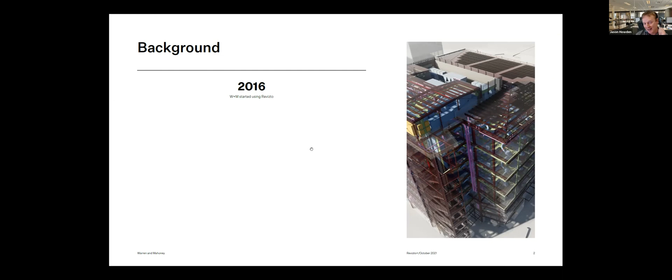Have you flicked slides, mate? Because we're still seeing the Revizto Plus slide. Oh, that's probably because it's crashed. I'll just reshare. Thanks, mate. Thanks for that. Is it flicking slides now? It's still sharing. Classic, it would be me that has the problems with Zoom. How's that looking now? Brilliant, and it's flicking. Michael shared screens on the other side. Anyway, I'll flick through the numbers because I've already talked about them.

2021 introduces a new era of collaboration. We feel pretty strong with Revizto Plus that it's hit the nail on the head, particularly for the way we want to work, and this presentation is covering some of the aspects of that.

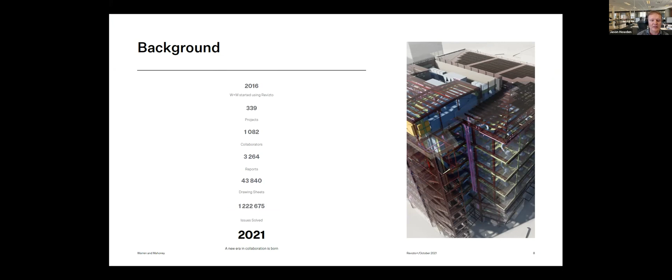Prior to Revizto Plus, our workflow—probably our past workflow now—was we'd have to export data, federate data, analyze that data, and then publish it to Revizto. Then we'd be able to report on it, share it with teams, and then get busy making the corrections. That was a reasonably efficient process for us. We'd worked hard to refine every step of the process, but it was still feeling like there was opportunity for refinement.

What we're calling collaboration evolved: now we just jump straight to exporting stuff to Revizto. We jump straight to sharing that information. Then we analyze, then we report, and then we can get busy revising the models.

I want to talk through a case study that we're doing live. This was a case study that we ran Revizto Plus on in the closed beta. We were very fortunate to have proactive, innovative clients, project managers, and a consultant team that we were working with. A little shout out to the University of Otago, the Building Intelligence Group, Baker Garden, Calibre, Cosgroves, Pedersen Read, and Beca for coming on this journey with us.

What we've loved about Revizto: search sets. Brett's already talked about search sets, and I think the strategy for almost mandating search sets is brilliant, because once you start to leverage the search sets and the data it can expose within the model environment, the world really does change.

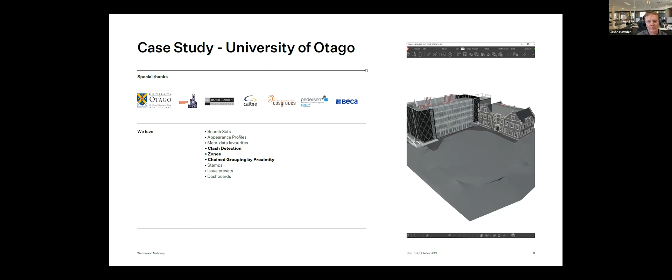I'm going to start at the start of our journey. The start of our journey starts with understanding our coordination matrix, or clash automation matrix. We really sat back and looked at all of our issues that we were tracking, all of the requests we were getting from clients and consultant teams, contractors and subtrades, and we started to map out at a very granular level what was important to each stakeholder, their priority, their tolerance. In doing this exercise, it became quite clear that if we could standardize the naming, grouping, or classification of each of these issues, we could create a system that could be automated.

We sat down to do this with Revizto Plus in mind, but at the time we made this, we were taking a leap of faith. We didn't have hands-on with Revizto Plus at this time, but we had insight that it was coming. We just responded to that leap of faith. We have around 260 individual clash tests in this matrix, and Revizto Plus has allowed us to essentially automate all of it, which is really exciting.

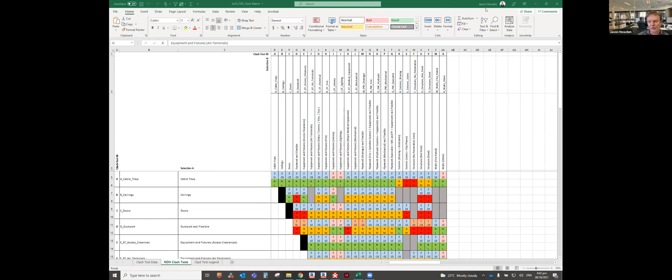The next place that I'm going to jump to is the Revit environment. And I think for us, what Revizto Plus has done is really enabled a bunch of workflows where we were having to invent workflows and workarounds on top of workflows to achieve an outcome. One of the outcomes that we were wanting to achieve with our work, because we work with a diverse range of client teams, consultant teams and contractor teams, is we were wanting to get some consistency, particularly with

the look and feel of the Revizto environment, with models coming in and every stakeholder having their own kind of appearance or view setting. We were wanting a way of controlling that. In our previous workflow, that was quite time consuming and quite cumbersome. It wasn't easy to transport. And with Revizto Plus, we were able to build our search sets to then link with our appearance profiles to really transport that to another level.

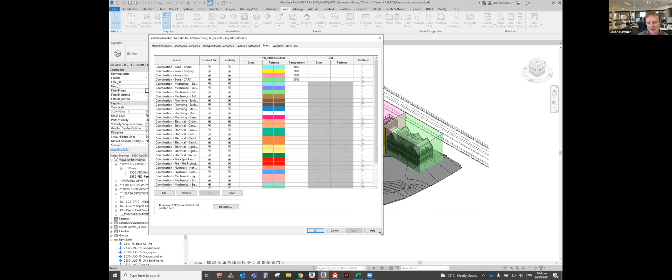So one of the things that we're doing in the Revit space is directly linking from BIM 360. So all of the models come through into a federated model space. I'm using some basic extrusions to create macro zones for the different buildings as three-dimensional spaces. And then inside there, we're using some view filters to create some coloring that we're bringing directly through into Revizto, which is an exciting move. It means this is templatable at a Revit level. I can swap out all the link files at will and transport this from project to project with relative ease.

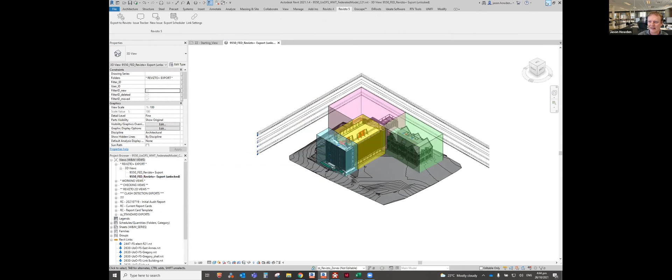And then to get it into Revizto, as I was commenting to a colleague, Michael, earlier today, I was running two projects side by side. One was in our previous workflow, one was in our new workflow. I was commenting that all I had to do was click this button in our new workflow, whereas the other project had several buttons to click and took infinitely longer.

So once it's in Revizto, at the face of it, it looks pretty much like how we were always doing it. The big changes that we've made with Revizto Plus were in preparation for the clash automation, which links back to that clash matrix that we saw before. We're heavily using the search sets feature inside Revizto. I don't think we necessarily followed Revizto in this space; we kind of got to the same destination at the same point. But creating some coordination search sets that mimic our matrix meant that we removed a lot of duplication and got a lot of power from it.

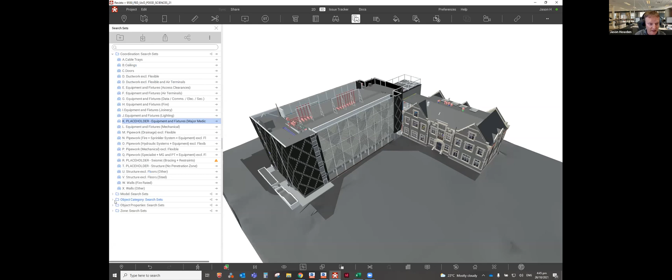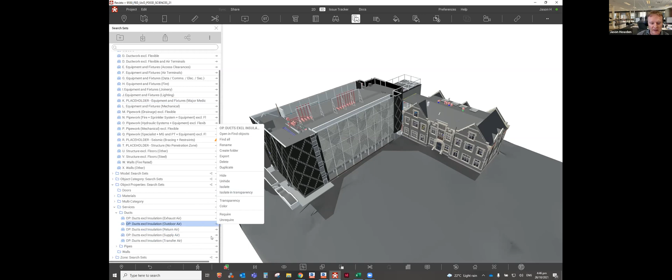Our classification system's just an alpha system, and each of these search sets nests inside another search set, which might be an object category search set, or an object property search set, depending on the type of object that we might be wanting to search for. Compound objects, as I like to call them, things like ducts and pipes, often have different items that we want to separate out. This allows us to do a whole bunch of really cool stuff. If we just want to see all the supply air ductwork, right click, isolate, bang, there it is. But it also means that we can test on that and report on that as an individual item.

I'm going to say big shout out, thank you to the Revizto team for bringing the home button back. Love it. It's my favorite button.

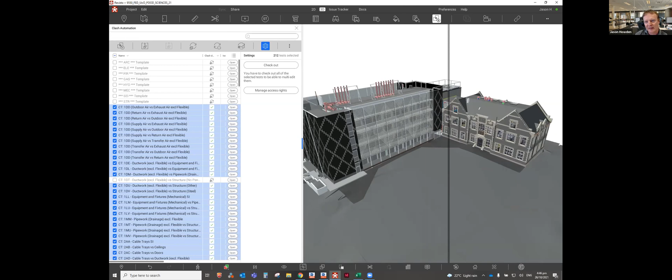In terms of the clash automation, I spoke briefly about the 200 plus clash tests. What I love about it is you can grab them all and then just run it, and it runs so fast. I kid you not. In the previous workflow, it used to take hours on some of our projects. Just the time saving alone, being able to come in, select one button, run it and have it complete in minutes, is a big saving.

But the stamps and the way we can filter these items is a big plus. So we use a classification system where we group the big stuff, the small stuff, and the trivial stuff, so we can report on it separately and also direct different teams to it. But we've doubled down on the stamping, and the stamps for us do a couple of things. I'm going to talk a wee bit about the stamps.

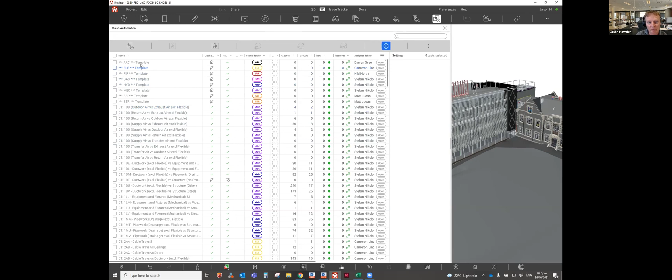So the stamps are part of our clash automation, and with our stamps I've set up templates for each type of stamp, which we can come to and edit, and I can quickly filter my list, so I can see all of the stamps in order or all of the names in order, but I can update a template and then apply it to all of the ones that have a similar stamp with a couple of clicks.

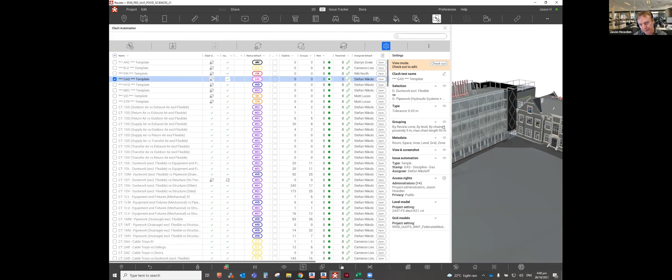In terms of the way we're templating it, we're templating both the grouping, some of the metadata, and really looking forward to when the clash or the issue automation comes online, so we can do more with that down the track. The grouping that we're doing in here, we're using a simple system of zone level chain proximity. And after tinkering around with the chain proximity, we found that 5 meters by 50 meters seems to be a really good fit. And I'll show you what that looks like.

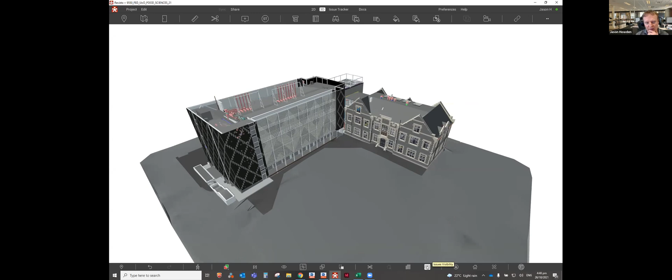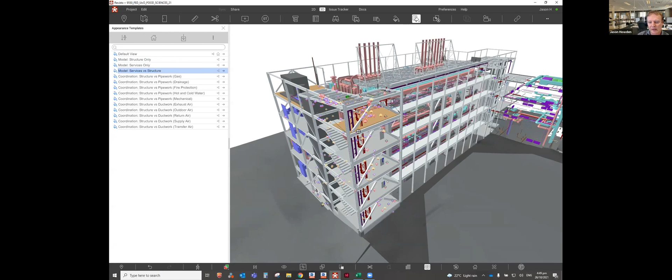The stamps, so I talked a wee bit about stamps and why it's so important to us, or one of the nifty features that we found with the stamps was the ability to see in context. So I've already talked about the zones of this project, but if I turn on all of the issue flags, the stamps actually give us really good intel into where all of the issues are, and who has those issues, in any particular part of the building. And then with the combination of the appearance profile, I can quickly just jump into and interrogate the building within a few clicks of the mouse, knowing that I'm always getting to where I need to.

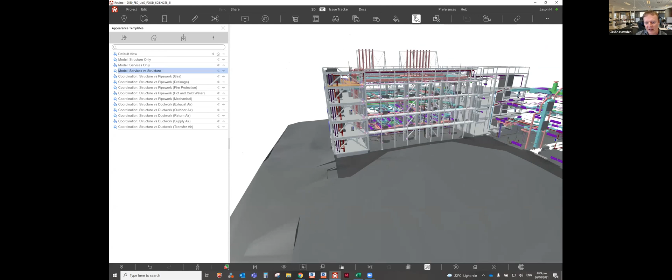Combine that with the issue presets in the issue tracker, I can then switch to another part of the building, filter those issues, jump back and see those changes update in real time. A simple little tag means so much. And the other bit that I like with this little tag is I love the fact that it has that little bit at the bottom that shows you the issue status itself, so you can track the status of these items as they roll through as well.

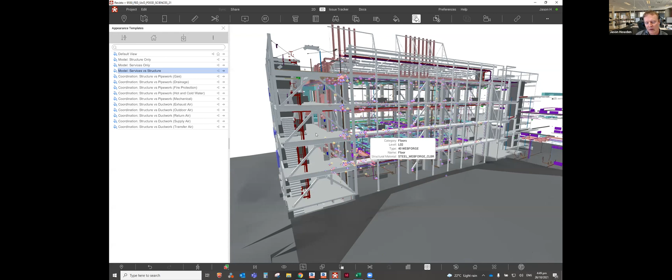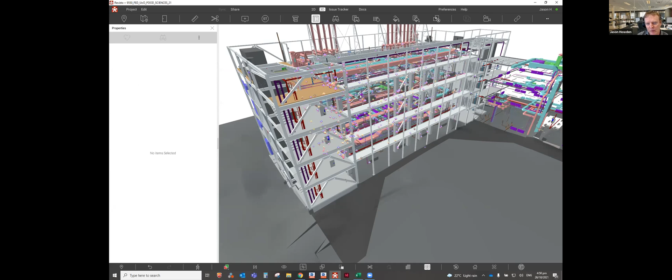I mentioned the properties of objects. So if I just highlight an element here in this project, we're using a number of favorites on these projects to understand different, I guess, constraints, moving parts, exposing the metadata behind it. What that means is when I'm looking at an issue, and say I've got a clash that's been detected, I can hover over it and get some quick intel. So I don't need to double click to interrogate it. I can just hover over.

I can see it's a 250 by 250 duct. I can see its bottom elevation is 2.4. I can see it's on level 1. So if I know that all ductwork needs to be 2.5, I can hover over it and see that the ductwork is below 2.5 at a glance as well.

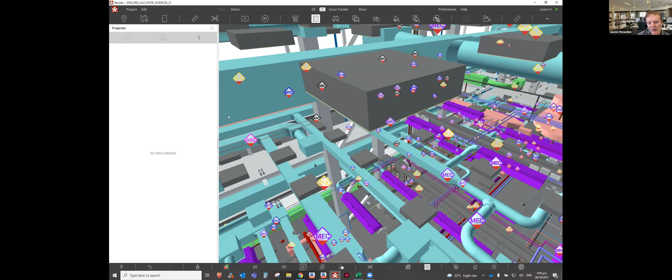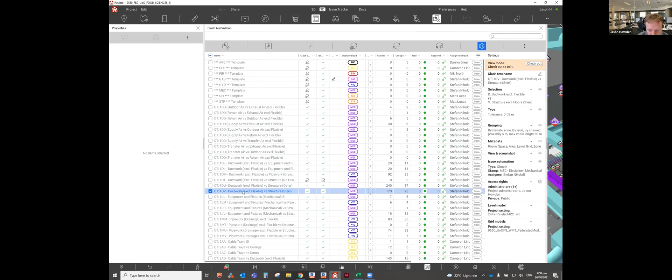Just checking time. I could talk for hours about Revizto Plus, but I do want to show off that one feature, which is the grouping. On previous projects with our previous workflow, it almost felt like a never-ending battle to group and filter the issues that were detected by the machine to make them sensible things. One of the things that I really love with Revizto Plus is you get to see the count of the number of items that are in this one issue.

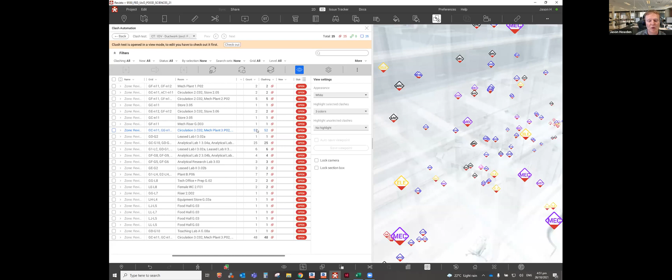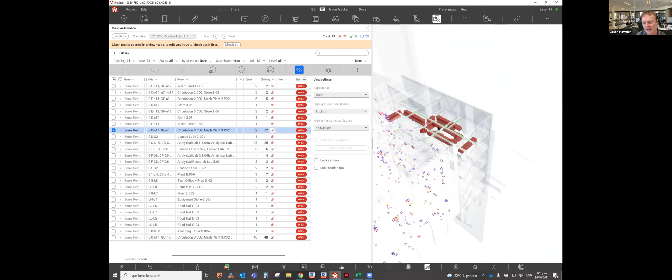And for us, this was a game-changing moment to be able to come in, see the wood for the trees, use our appearance profiler. I'll just flick back to home. I'll jump on that again. And actually get a real in-depth understanding that this one issue relates to an area that has multiple things going on with it that predominantly relate to structures and plant needing to be coordinated.

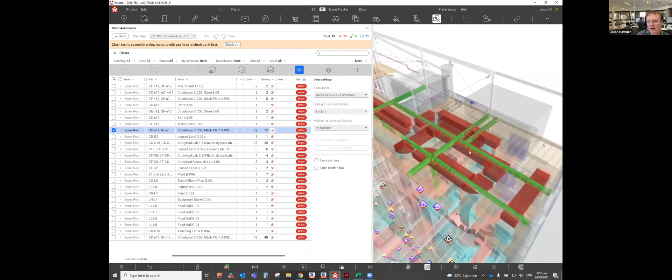A game-changing moment for our team and the way we review stuff, but also a game-changing moment for the teams that we work with, so they don't have to be, I guess, what's the right word, immersed within thousands and thousands of issues. They can get meaningful issues at a glance, all pretty much automated.

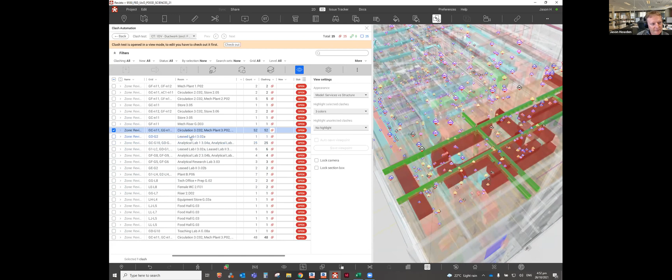How are we going for time, guys? We're okay. It's 8 more minutes. I guess we can extend by a few minutes as well. No one's going to mind.

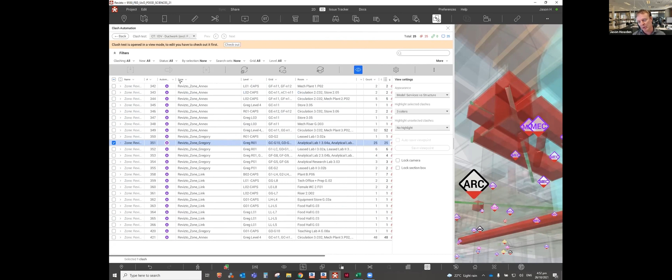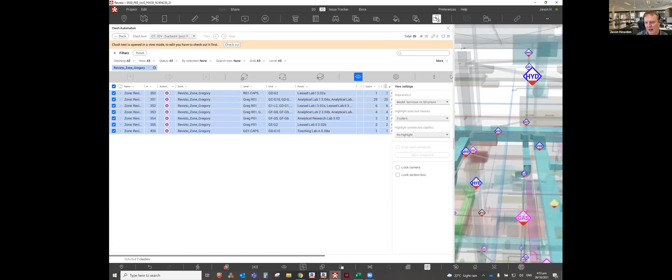So if there's anything else you want to show. I think the last thing, and Brett touched on it, if you set your zones up, you can do your filtering based on zone as well. This building has got 4 distinct sub-buildings in it, and I can go up here and add zone as an actual filter item, and then I can go and look at all of the issues that relate to the building that is being coordinated now, highlight them all. Game-changing moment to be able to see all of those things in one fell swoop.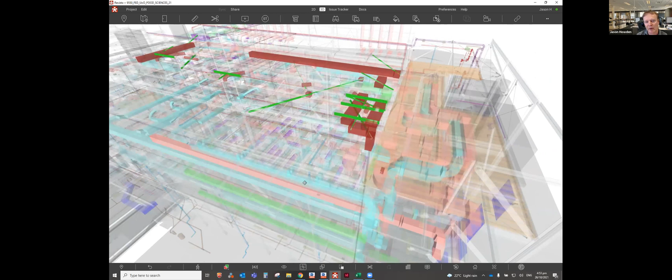It is taking a lot of pain out of the tedium of having to go through hundreds, thousands of individual issues. I can now look at the big issues. I can have the big conversation and mitigate all of the little conversations in the process. So I hope others will jump on board. There is a lot to uncover with Revizto Plus. I'm only scratching the surface in a 15-20 minute presentation. It is game changing.